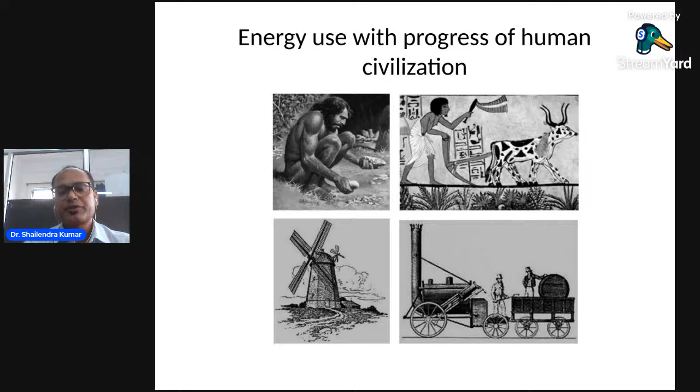First of all, I would like to discuss energy. Energy means renewable energy and non-renewable energy. Basically, renewable energy is the energy obtained from regenerative or virtually inexhaustible sources of energy occurring in the natural environment, like solar energy, wind energy, geothermal energy, biomass energy. This is also referred to as non-conventional sources of energy.

In the category of non-renewable energy is basically a static form of energy that remains bound unless released by human interaction. Examples are fossil fuels like coal, oil, natural gas, and nuclear fuel. We are all well familiar with the generation of electricity or energy with the help of fossil fuels like coal, oil, natural gas, and nuclear fuels. This type of energy is also called finite energy or conventional sources of energy.

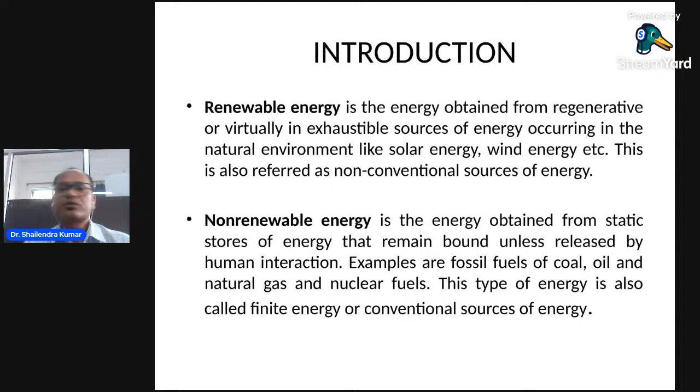Let's move towards energy sources. There are six ultimate sources of useful energy: the sun; the motion and gravitational potential of the sun, moon, and earth; geothermal energy, chemical reactions and radioactive decay inside the earth; nuclear reactions on earth; chemical reactions from minerals sources; and fossil fuels that we are presently using like petroleum products and gases.

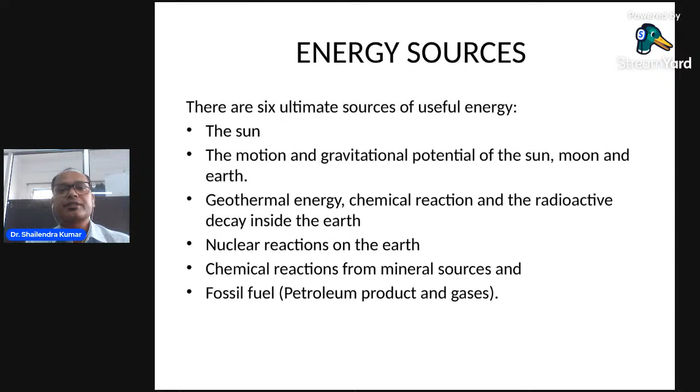Let's discuss the forms of energy. We use energy in many forms like kinetic energy, chemical energy, electrical energy, heat energy, radiant energy which comes from the sun due to radiation, and nuclear energy. There is an important principle stating that the total amount of energy in a closed system remains constant. Energy may change from one form to another, but the total amount in any closed system remains constant. This principle is known as conservation of energy. It is extremely important for understanding a variety of phenomena and various forms of energy.

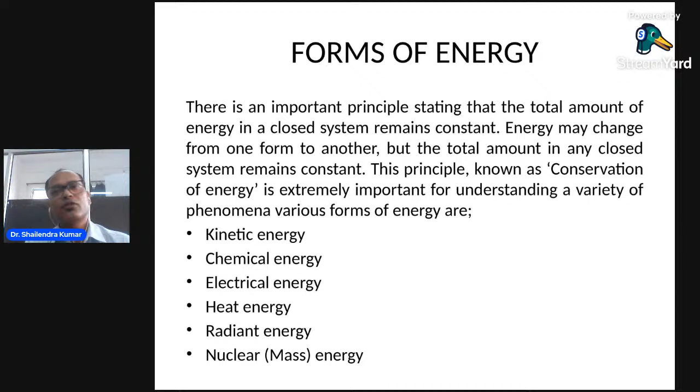So the classification of the energy sources based on usability of energy. Some examples are coal, crude oil, sunlight, wind energy, running rivers, vegetations, and radioactive materials like uranium.

These are the primary energy sources, defined as energy found in the natural form that has not been subjected to any human engineered conversion process. It is energy contained in raw fuels like coal, which is found inside the earth, and crude oil, also found inside the earth.

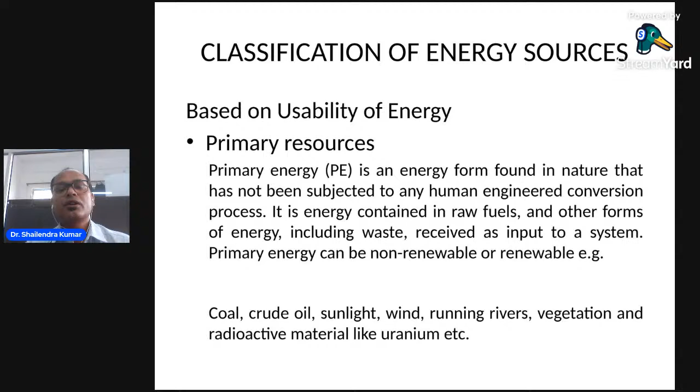In secondary sources, basically the secondary energy sources like electricity, thermal energy, refined fuels, synthetic fuels, hydrogen fuels, etc., are derived from the primary energy resources.

For example, electrical energy is basically generated from various sources. You can generate it from coal, from oil, or from gas. If you are driving your car or two-wheeler, you will find that the oil, as energy conserved in the form of oil, can be converted into electricity.

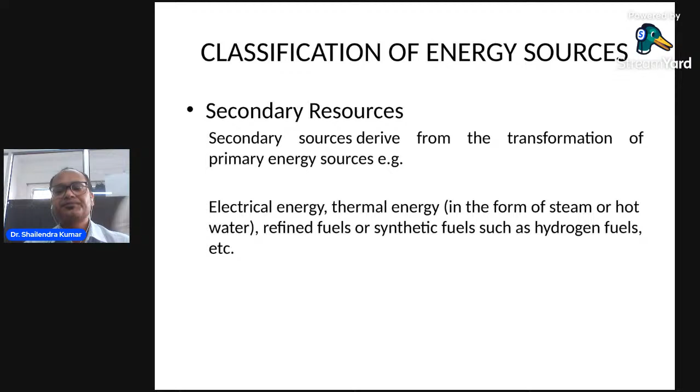Based on the long-term availability, if we classify, non-renewable energy sources are finite and do not get replenished after their consumption. These are called non-renewable energy, like fossil fuels and uranium. They tend to deplete with time. This is the drawback of the non-renewable energy sources.

In case of renewable energy sources, energy is obtained from sources that are essentially inexhaustible. Examples we have observed are wind power, solar power, geothermal, tidal power, and hydroelectric power, etc.

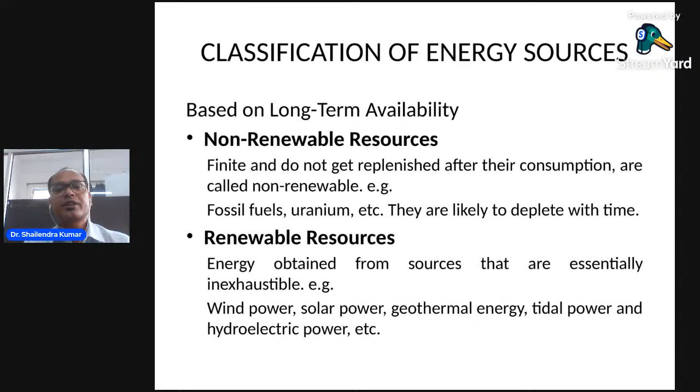Before going further, we will discuss energy, economy, and social development. Basically, a country's development depends on its consumption of energy. If a country consumes a large amount of energy, its growth towards the developed side is faster. If the country is using lesser energy, its growth will be lesser.

Energy is universally recognized as one of the most important inputs for economic growth and human development. Modern services such as electricity, natural gases, modern cooking fuel, and mechanical power are necessary for improved health and education, better access to information, and industrial as well as agriculture productivity. Thus, secure, reliable, affordable, clean, equitable energy supply is fundamental to global economic growth and human development.

So there are four major energy use sectors. One is commercial, second is industrial, third is residential, and fourth is transportation.

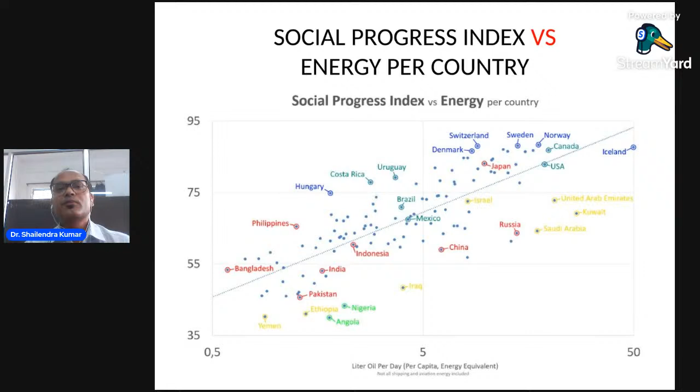If we see this graph, we find that the developed countries show this pattern — basically a social progress index versus energy per country. We see that India is consuming less energy and development is lesser than these developed countries, if you take the reference of the USA. So this is the reference line. We see that some developed countries are consuming more and more energy and fall into the category of more social progress than these countries.

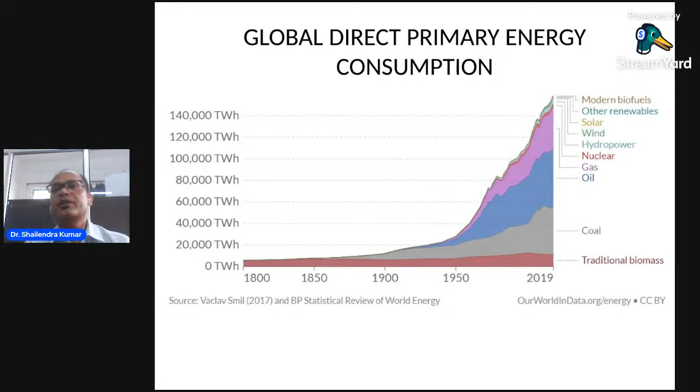So these are the graphs. This graph shows the consumption of modern biofuels, other renewables, solar, wind, hydropower, nuclear, gas, and oil, after that coal and traditional biomass. So this is basically the global direct primary energy consumption.

Primary energy consumption in 2020, country-wise: China is consuming a higher amount of energy, which is 145.46 into 10 to the power 18 joules, larger than the United States. The United States is consuming 87.79 into 10 to the power 18 joules, while India is consuming very less, that is 31.98 into 10 to the power 18 joules. Russia is 28.31, Japan 17.03, and Canada is 13.63, all into 10 to the power 18 joules.

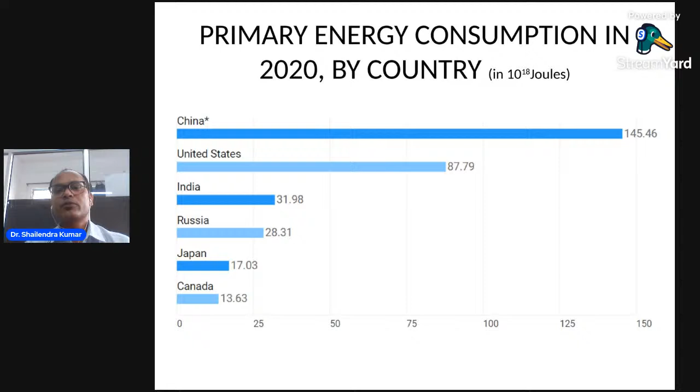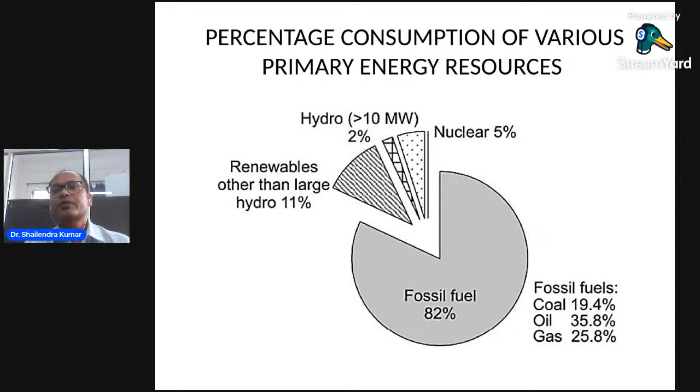If we talk about the percentage consumption of various primary energy sources, we find that we are consuming fossil fuels to a large extent — around 82% of energy from fossil fuels like coal, oil, and gases. Renewables other than large hydro are 11%, hydro is around 2%, and nuclear is 5%.

Energy chain is basically where a primary energy source is transformed to electric energy, and the electrical energy is used by the consumer through transmission lines. For the case of usable fuel, the primary energy is transformed into usable fuels, and these are transported by roads, rail, ocean, and pipelines towards the consumer.

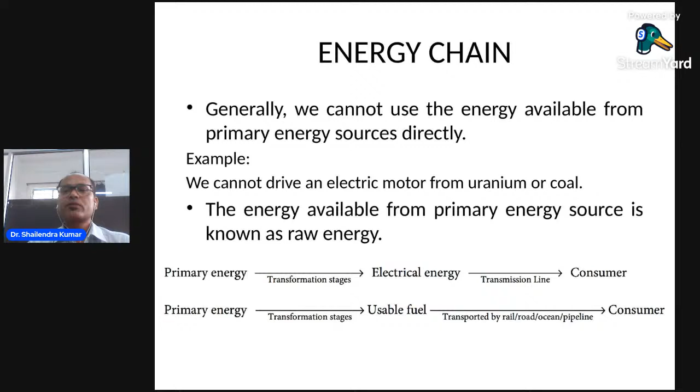Generally, we cannot use the energy available in the primary energy sources directly because we cannot use coal to directly convert energy - we need some process to use it. We cannot drive the electric motor from uranium or coal, so a conversion is also required. The energy available from the primary energy source is also known as raw energy.

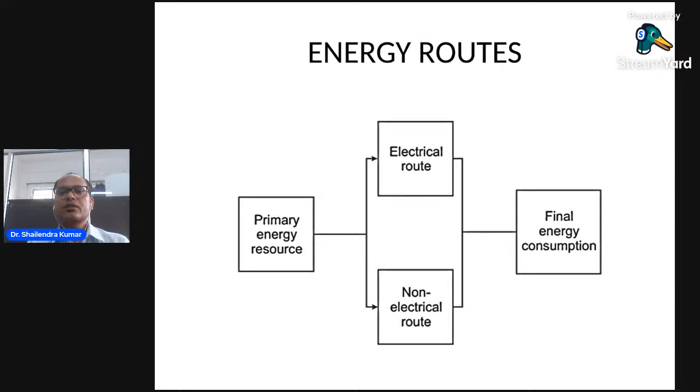Energy routes: from the primary energy resource we get the final energy consumption with two routes - one is the electrical route and the second is the non-electrical route. Common forms of energy are electrical energy, mechanical energy, thermal energy, and chemical energy.

About 30 to 40% of energy distribution in the world is met through the electrical supply system at present. It can be very conveniently and efficiently converted to other forms of energy.

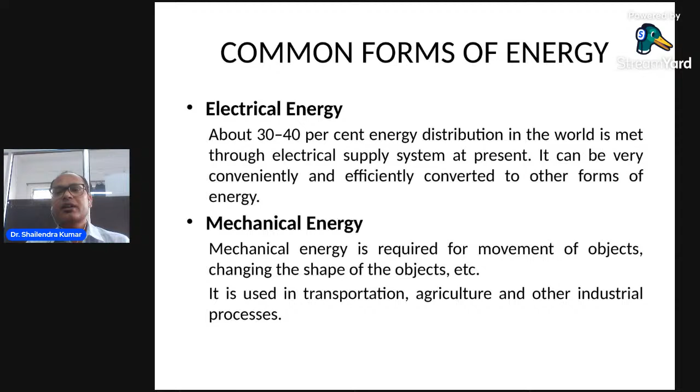The second form is mechanical energy. It is required for movement of objects and changing the shape of objects. It is used in transportation, agriculture, and other industrial processes.

In case of thermal energy, it is used to raise the temperature of an object during industrial processes. It can also be converted to mechanical energy with the help of heat engines.

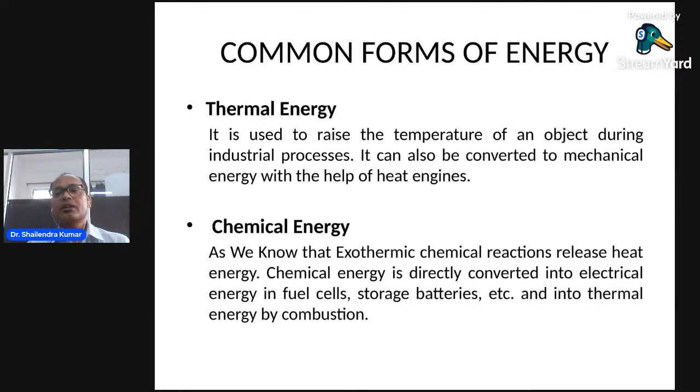As we have seen in heat engines, we warm the water and use the steam to convert the energy into electrical form. And chemical energy - as we know exothermic chemical reactions release heat - chemical energy is directly converted into electrical energy in fuel cells and storage batteries, and into thermal energy by combustion.

The advantage of conventional energy sources like fossil fuels, nuclear, and hydro resources is in terms of cost, security, and convenience - these are the parameters showing their advantage. In terms of cost, these are cheaper than non-conventional sources at present.

The security is that storage is easy and convenient - by storing a certain quantity, the energy available can be ensured for a certain period. The convenience is that these sources are very convenient to use, as the technology for their conversion and use is universally available. It was developed 2 or 300 years back, so it's very convenient to use. We are basically talking about fossil fuels like coal, nuclear, and hydro.

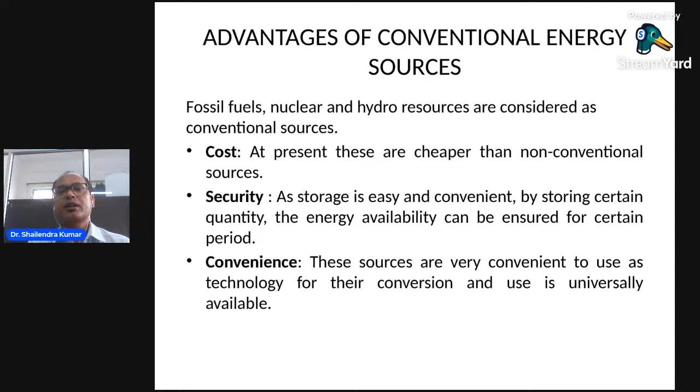What are the disadvantages? Fossil fuels generate pollutants which are very harmful for mankind. Main pollutants generated include carbon monoxide, carbon dioxide, nitrogen oxide, sulfur dioxide, particulate matter, and heat. The waste material generated in nuclear plants has radioactivity at a dangerous level. That's why there is a need to change from conventional energy to non-conventional energy.

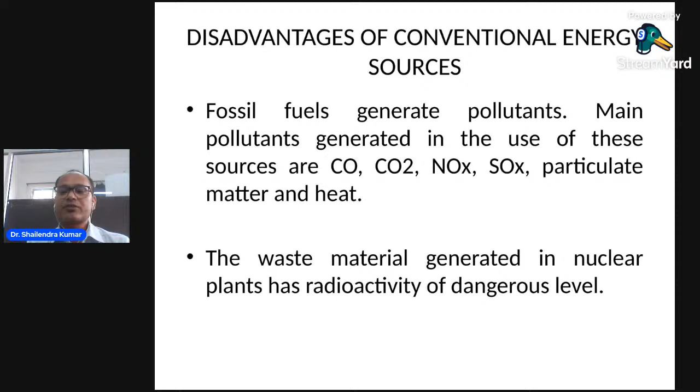What are the advantages of non-conventional energy resources? Non-conventional sources are available in nature free of cost, like the sun - the sun's energy will always be with us. They produce very little pollution, thus by and large they are environment friendly.

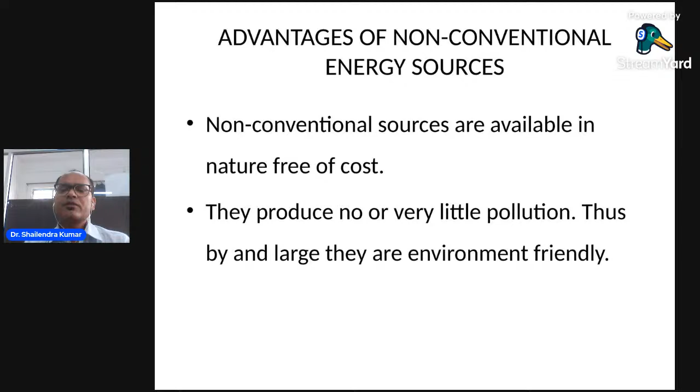If you talk about hydropower, wind power, solar power, you'll find they are very environment friendly. They generate very clean energy and do not generate pollution. If they do generate pollution, it's very little compared to the conventional energy resources - for example, batteries.

So the disadvantage, in general, is that the energy is available in a diluted form for these sources. Though available freely in nature, the cost of harnessing energy from non-conventional sources is generally very high.

There is uncertainty of availability - the energy flow depends on various natural phenomena beyond human control, like rivers. If a river has very little water, it's very difficult to generate a high amount of energy from hydropower. At night, you cannot generate energy from solar photovoltaic technology. These are the challenges, or disadvantages, of non-conventional energy sources.

Next is the difficulty of transporting this form of energy and difficulty in storage. If you generate solar energy from solar photovoltaic technology, it's very difficult to store in higher amounts because we need a battery. In that case, the amount of battery required is quite high, and the battery also generates some pollution.

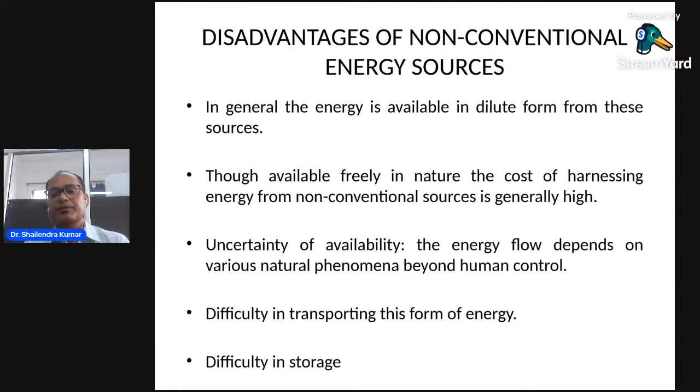The examples of the sources, the primary energy sources, I've categorized into primary energy sources, energy system component, and energy carriers. Non-renewable energy sources basically are oil, coal, natural uranium, natural thorium. These are the fossil fuels.

Oil is converted by oil refinery to fuel oil. Similarly, coal or natural gas is converted by fossil fuel power station to enthalpy, mechanical work, or electricity. For example, in a steam engine, the coal heat boils the water, and the steam moves the engine. This is basically mechanical work, and it can also generate electricity.

Natural uranium is converted in the nuclear power plant to electricity. Basically, we need electricity. Natural thorium is converted in the thorium breeder reactor to electricity or enthalpy.

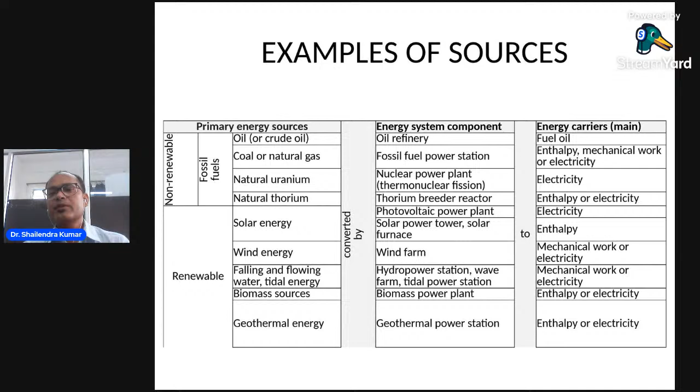The primary energy use is defined in quadrillion British thermal units. Here we see that liquid energy and coal usage is much higher, and in future it will be used also. Similarly, natural gas consumption using natural gas or renewable sources will also increase till 2035.

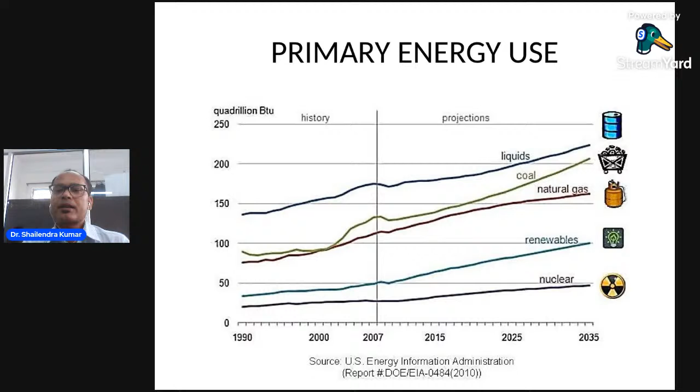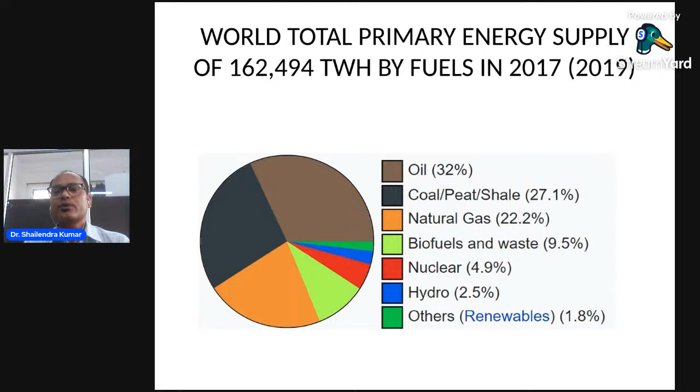World total primary energy supply was 162,494 terawatt hour by fuels in 2017. The primary energy supply breakdown is: oil 32%, coal 27%, natural gas 22.2%, biofuels and waste, nuclear, hydro, and other renewable 1.8%.

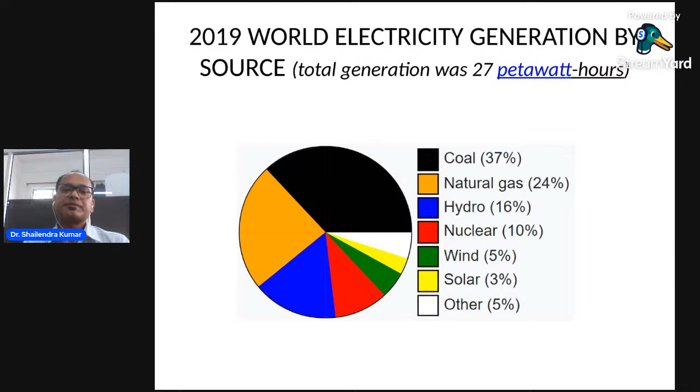Trade-off between energy and environment: it is very difficult to maintain this trade-off because if we use conventional energy sources in higher amounts, we are growing, but we are generating pollutants which are very harmful to humankind.

The environment means the surrounding. Basically, environment consists of air, soil, water, and the main constituents of the...

Piyush, Piyush, am I audible? Yes. Wait a second.

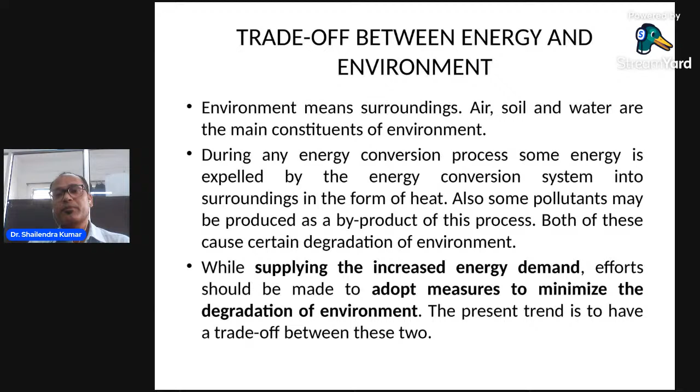During any energy conversion process, some energy is expelled by the energy conversion system into the surroundings in the form of heat, and some pollutants may be produced as a byproduct of this process. Both of these cause certain degradation of the environment. While supplying increased energy demand, effort should be made to adopt measures to minimize environmental degradation, so it's very difficult to make the trade-off in this situation. The present trend is to have a trade-off between these two.

Greenhouse effect: carbon dioxide envelope present around the globe, and the atmosphere behaves similar to a glass pane, forming a big global greenhouse. This tends to prevent the escape of heat from the earth. It's basically like a pan, and if we generate heat, the heat will exist inside the pan and will not come out. This prevents the escape of heat from earth, which leads to global warming. This phenomenon is known as the greenhouse effect.

Greenhouse gases include carbon dioxide, methane, nitrous oxide, chlorofluorocarbons, hydrofluorocarbons, hydrochlorofluorocarbons, sulfur hexafluoride, ozone, and water vapor, known as greenhouse gases.

Various pollutants and their harmful effects: particulate matter, also known as particle pollution or PM, is a complex mixture of extremely small particles and liquid droplets.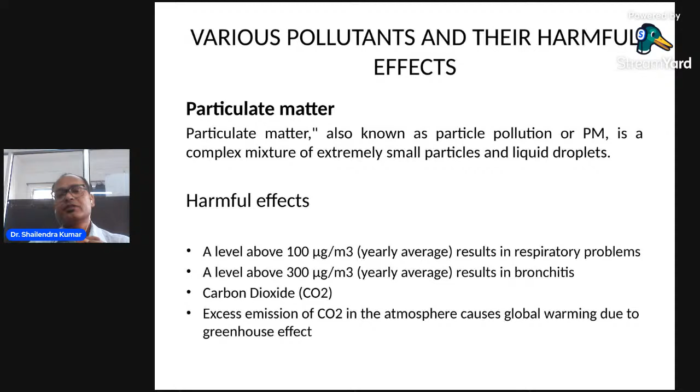Second is carbon monoxide, formed due to incomplete burning of carbon in inadequate air, such as incomplete burning of coal. Harmful effects are: carbon monoxide concentration of 100 ppm causes headache, 500 ppm causes collapse, and 1000 ppm is fatal. Smokers inhale carbon monoxide concentration of 400 to 450 ppm.

Next is sulfur oxide. The presence of sulfur dioxide in air is mainly due to man-made reasons involving combustion of fuel containing sulfur. This causes respiratory diseases, acid rains, and corrosion of metals.

Similarly, nitric oxide and nitrogen oxides are produced from the reaction of nitrogen and oxygen gases in air during combustion. Harmful effects are: they cause respiratory and cardiovascular illness, deprive body tissues of oxygen, form acid in the lungs, and are more toxic than carbon monoxide. The safer limit is basically 100 microgram per meter cube.

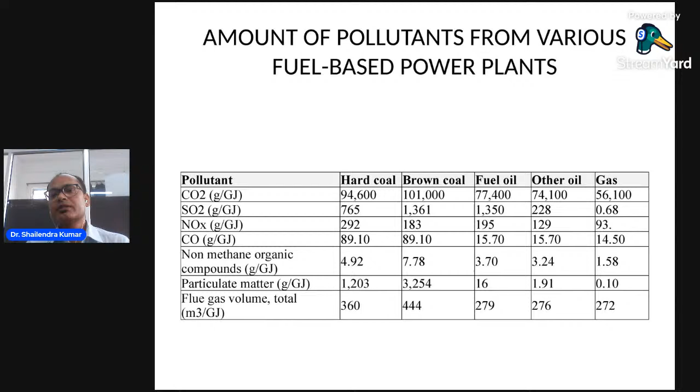non-methane organic compounds, particulate matters, and fuel flue gas volume total, which is 360, and is lesser from gas, that is 272.